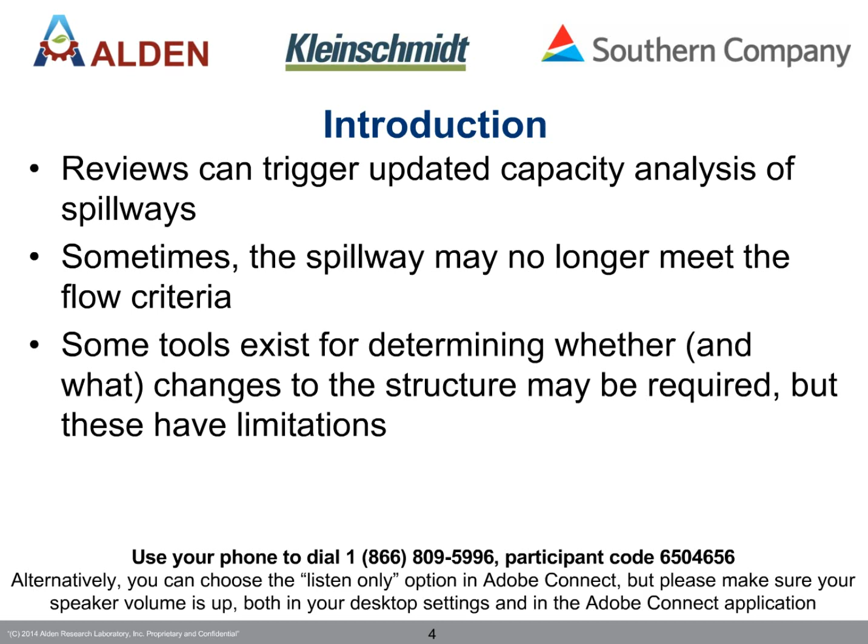So to start out, we have Paul Sear, who's a PE. He's a principal of Kleinschmidt Associates. He's been with them since 1977. He specializes in dam safety and vulnerability security inspections, design and stability analyses of dams, floodgate design, and construction and maintenance inspections. Since 1988, he's been recognized by FERC as an approved independent consultant and a PFMA facilitator. He served on FERC's Gate Committee, developing guidelines for their proposed risk-informed decision-making program, and he was the secretary and contributing author of the publication Civil Works for Hydroelectric Facilities, Guidelines for Life Extension and Upgrade, written by a hydropower task committee for the ASCE Energy Division. He has a bachelor's in structural engineering from Northeastern.

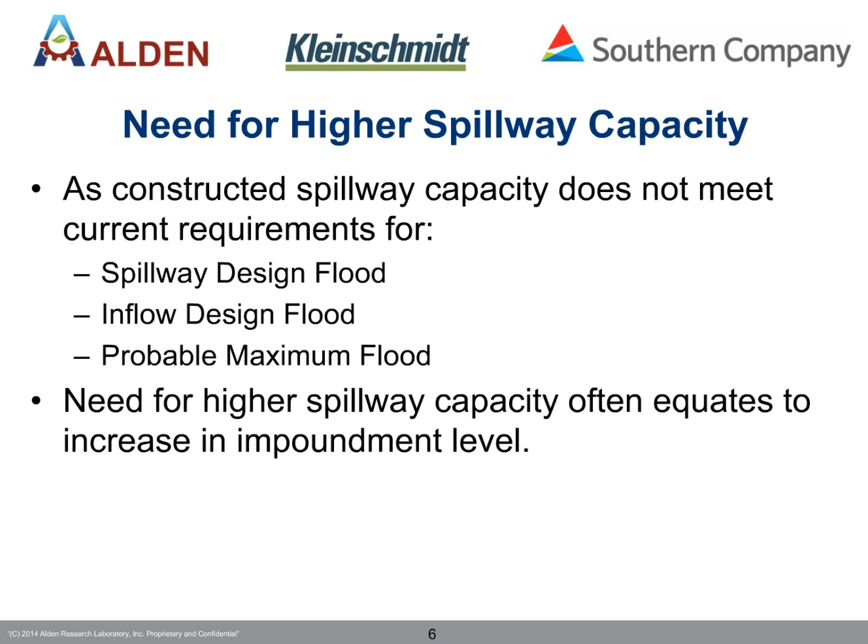Once you decide you need more capacity to meet the governing agency's design requirements, it all usually equates to one thing: we have a higher impoundment level. So the increase in an impoundment level starts to chase us. It has a direct negative impact on the stability of all the water retaining structures, not just the spillway, as a result of increased hydrostatic load on the dam, along with increased uplift pressures.

David, I don't know, we are missing figures on these slides. Oh, just click through and they'll come through. So sorry. Okay. Sorry, folks.

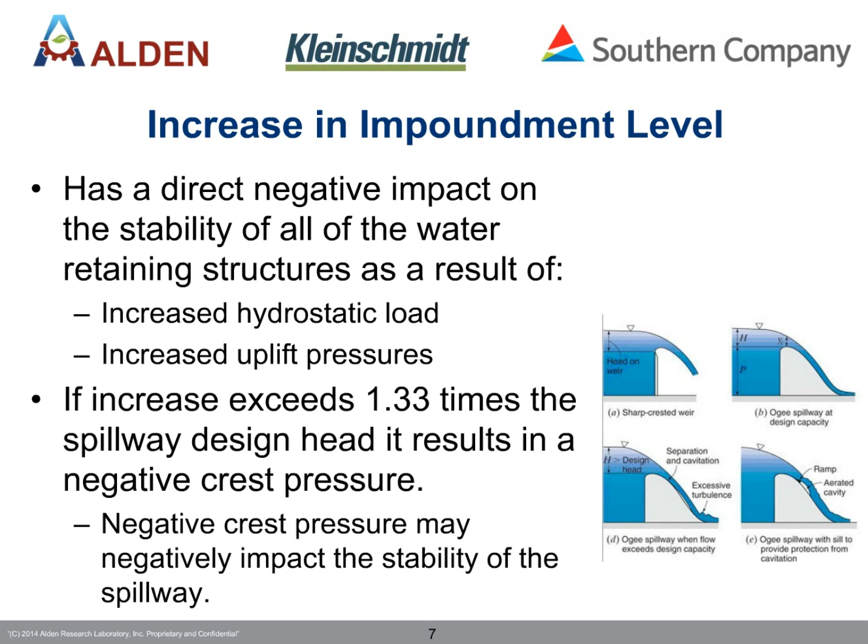But the Army Corps of Engineers has indicated that if your demand on your crest is about 1.3 times what the original design head was, you're going to result in negative crest pressures. The negative crest pressures have a negative impact on the stability of the structure because it's an extra force that, frankly, was never accounted for back before 1940.

We also have changes that have occurred on a spillway crest over time. Spillway gates are replaced—Obermeyer gates are an excellent example of a lot of people changing out old crest gates or flashboards. There's also things, and I think many of us in the north can appreciate this one, we do a lot of resurfacing of the downstream face of a dam. So ask yourselves, how many times have you actually restored that ogee crest to the original geometry it was based upon? All of these have one common impact.

It results in a change of the impoundment level, and it results in a change in crest pressures—they're all due to the spillway discharge capacity being increased.

The figures shown are of a real project. The upper right-hand side shows horizontally rotated flashboards. They're five feet high, originally built as vertical flashboard pins, and at some point got changed to horizontal. The photograph below shows what it looks like after it's been rotated, but before being restored.

It's supposed to be self-righting, but as you can imagine, you get debris underneath them, and they don't right themselves too well. So even though you have additional head on this structure, ask yourself: what does this new flashboard arrangement do for my crest pressures?

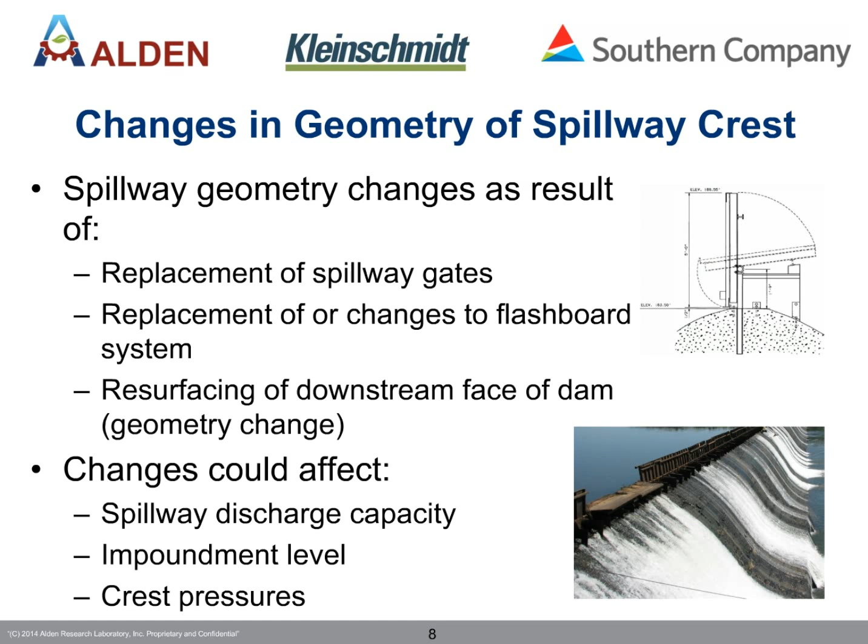Increased discharge capacity also results in a direct impact to the tailwater. As you increase your flows, you could literally blow the tailwater away—suppressing it right at the base of the spillway, and in doing so, reducing the resisting tailwater forces that may occur against the spillway.

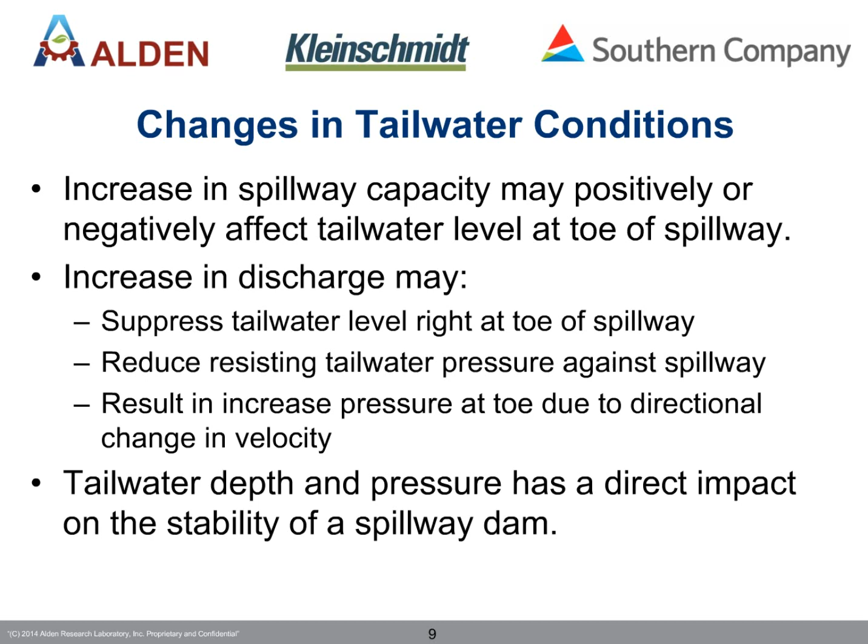At the same time, the increased velocities may actually result in a favorable positive pressure along the toe, due to the change in direction of the velocity flow. So tailwater depths and pressures on the downstream side of the structure have a direct impact on the stability of the spillway dam. They may not affect your non-overflow structures, but they will affect your spillway dam.

Earlier I said you could have an increase in positive pressures at the toe of the dam. If you have a dam with foundation drainage systems, the velocities increase the pressures on the outlet of the foundation drainage system. So the question that always gets asked is: do those higher pressures at the outlet get translated back underneath the dam via the drainage system itself, and do those pressures result in a decrease in stability of the dam?

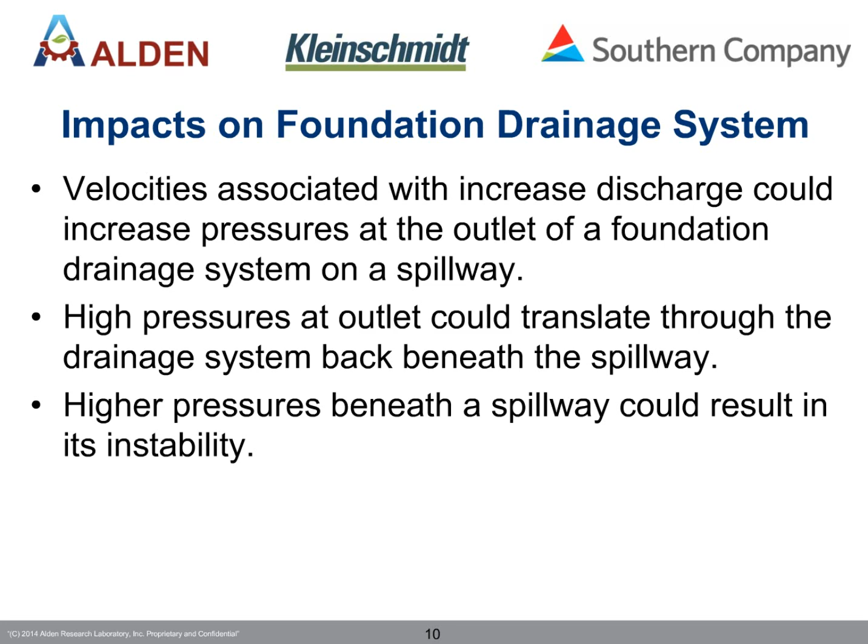So everything I talked about before has to do with what was happening on the head pond end.

Dams that are regulated by state agencies are governed by downstream development, which will have an impact on the dam's discharge capacity. As development increases, the dam's hazard classification increases, and usually, the higher the hazard classification, the greater the discharge capacity you need.

So, which means you get a choice: you expand your spillway, or you discharge more water over the spillway that you currently have.

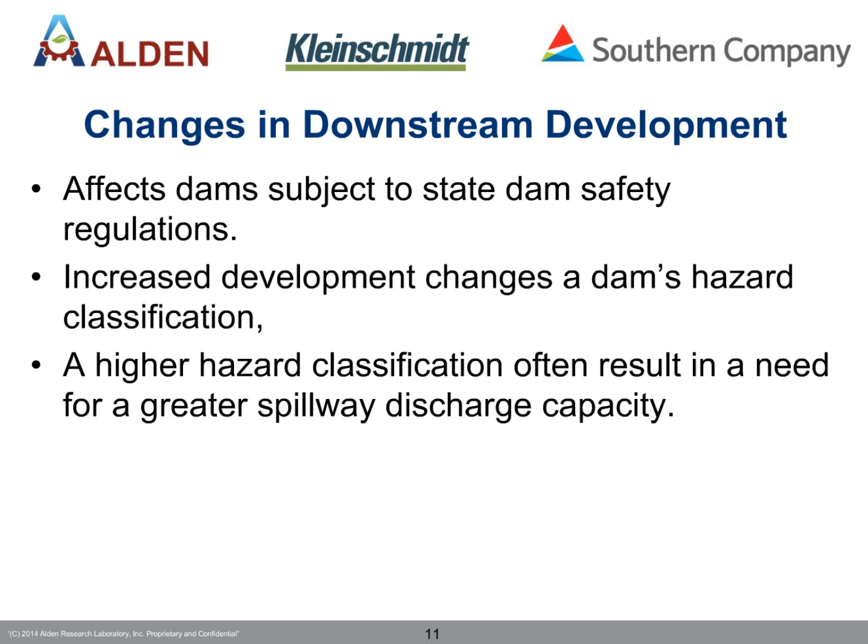So this actually closes my part of the discussion. Again, I'm viewing the structures as they exist, and I'm passing judgment back to the owner as to whether they meet the state or federal agency's current design criteria for spillway capacity and stability analysis.

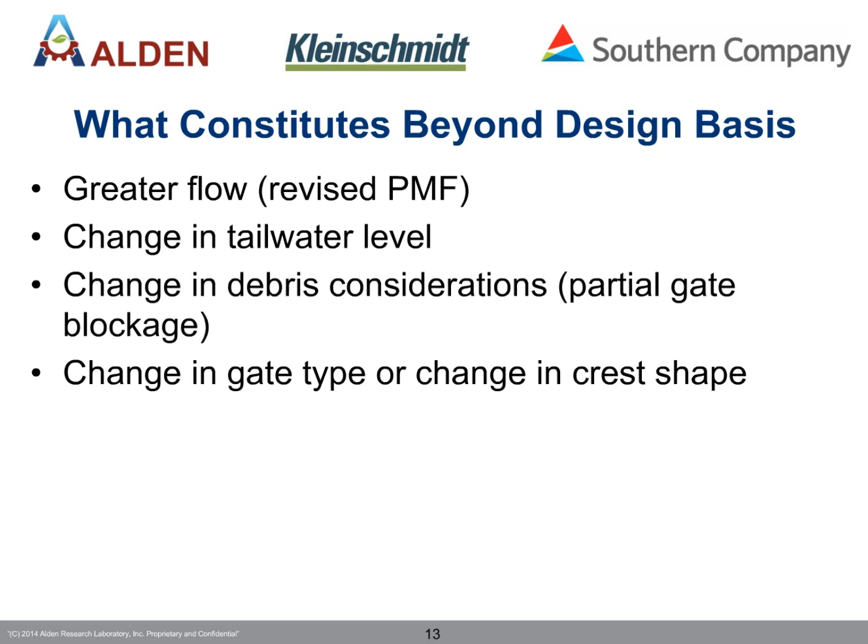So, changing debris considerations as well. This can be a partial gate blockage that might not have been considered in the original design, where you now realize that as debris builds up on the gates, they might not all operate exactly as planned. A change in the gate type or a change in the crest shape—if you replace one gate with a different type, that may affect the rating curve for that particular structure.

And then a change in reservoir operating levels. If you are increasing your pool level because of recreational needs or other considerations, that could change the flood routing through the reservoir as well.

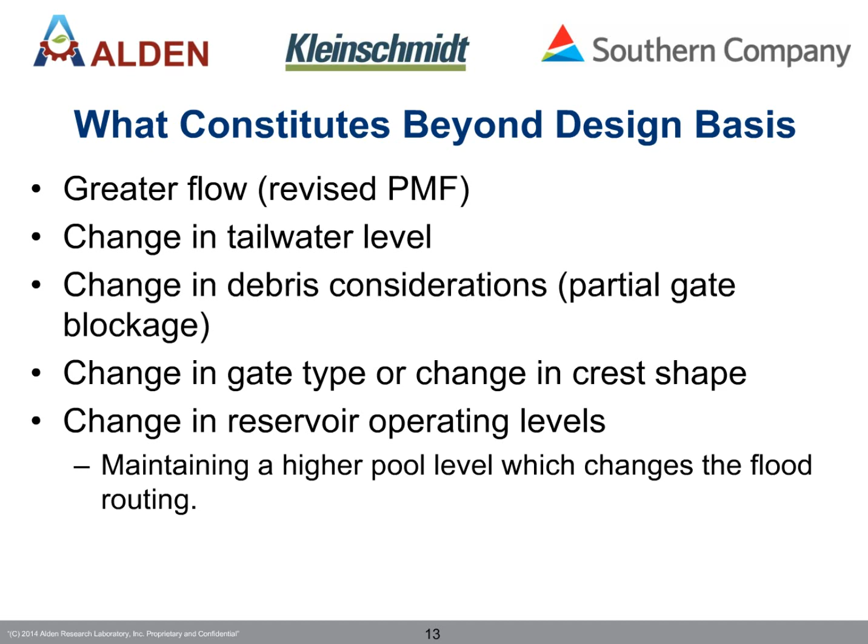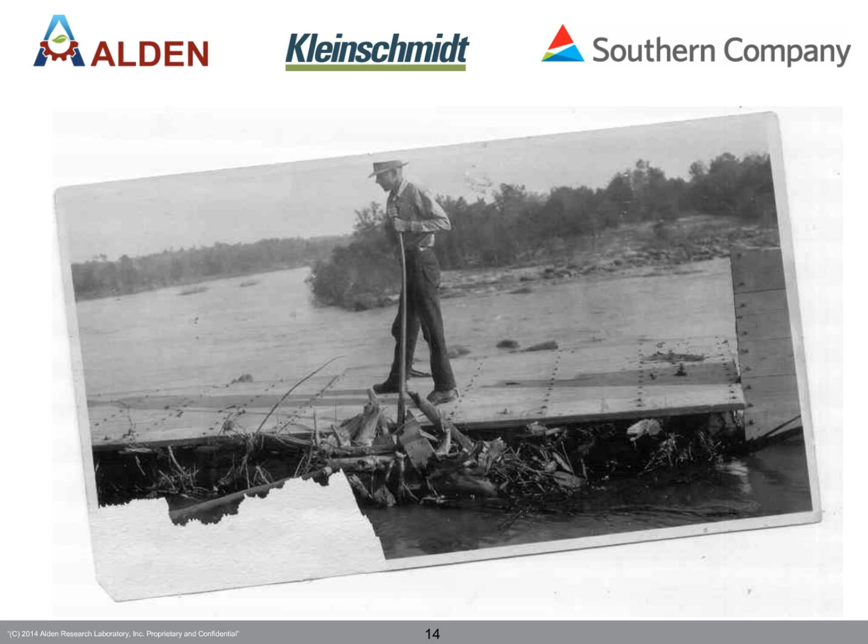You might remember Paul's picture of the hinged gate that could rotate. This is a picture, I think, of the same gate with debris built up, and obviously this spillway is not going to perform quite as expected because there's not a whole lot of water going through under the gate. Most of it will have to go over the top.

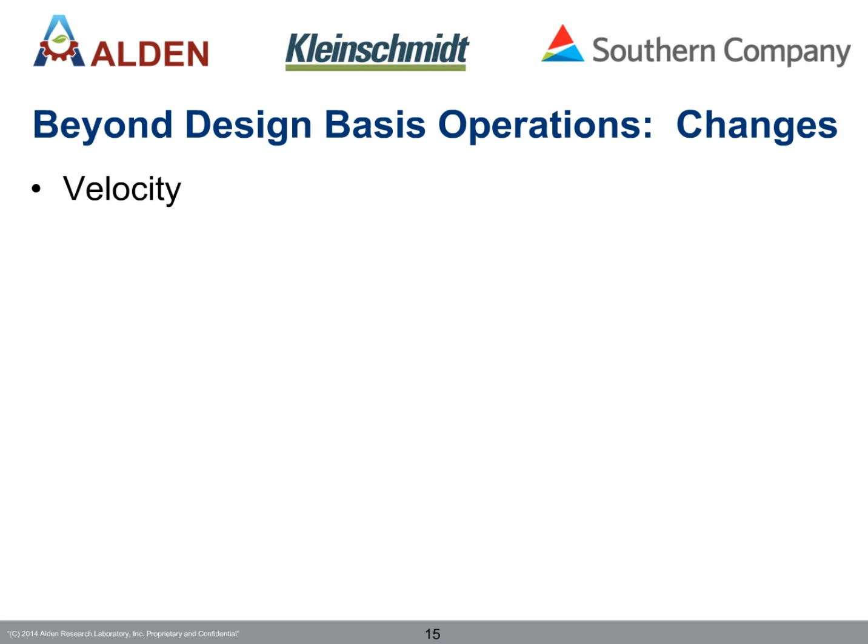So beyond design basis operations, what's going to change on the spillway from a hydraulic perspective? Well, the most obvious one is probably velocity. If you send more water down the spillway, there's a pretty good chance the velocity on the spillway is going to increase. The other thing that can change is surface pressure on the spillway.

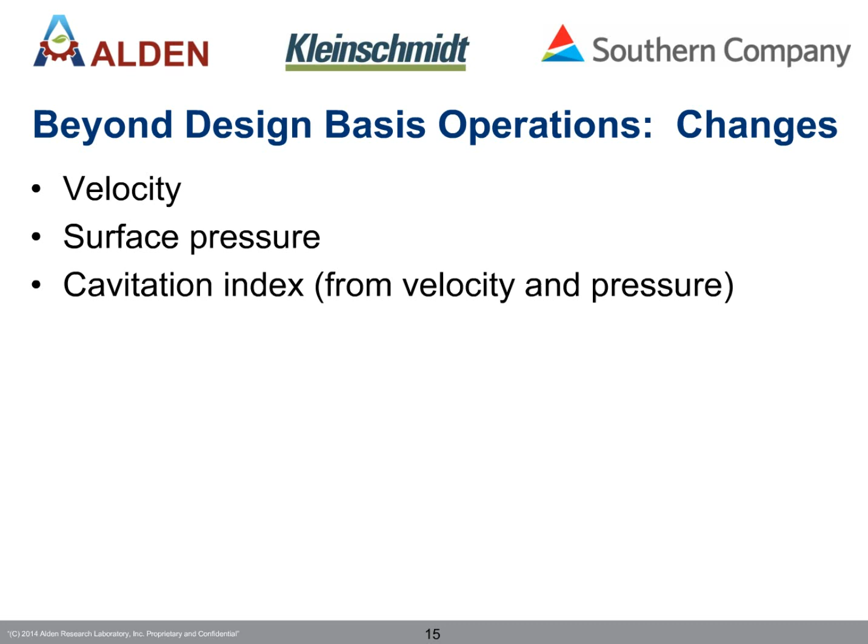And if the velocity were to change, and/or the pressure changes, that could result in a change in the cavitation index for the spillway as well. So we may start to see cavitation that we weren't seeing under the design flow conditions.

We can get uplift on a spillway, so even if there's no cavitation, that doesn't mean pressures might not be low enough to generate some uplift on the spillway surface.

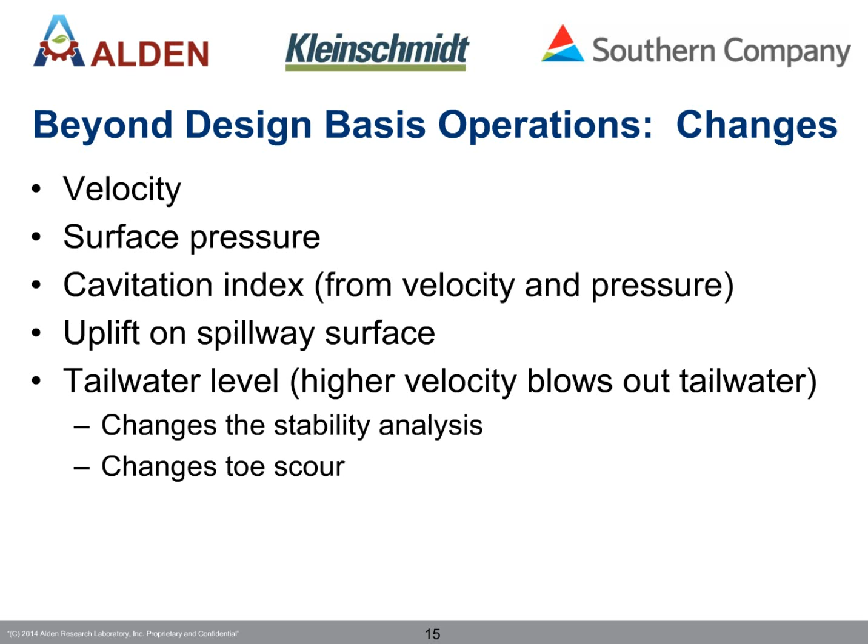And then tailwater level—we mentioned this a moment ago, that a higher velocity can result in a blowout of the tailwater, so you change the back pressure on the dam. That would be one effect on stability, but it can also change the toe scour at the dam. If you were counting on energy dissipation from that tailwater level to protect the toe, and the tailwater is blown out, that can change.

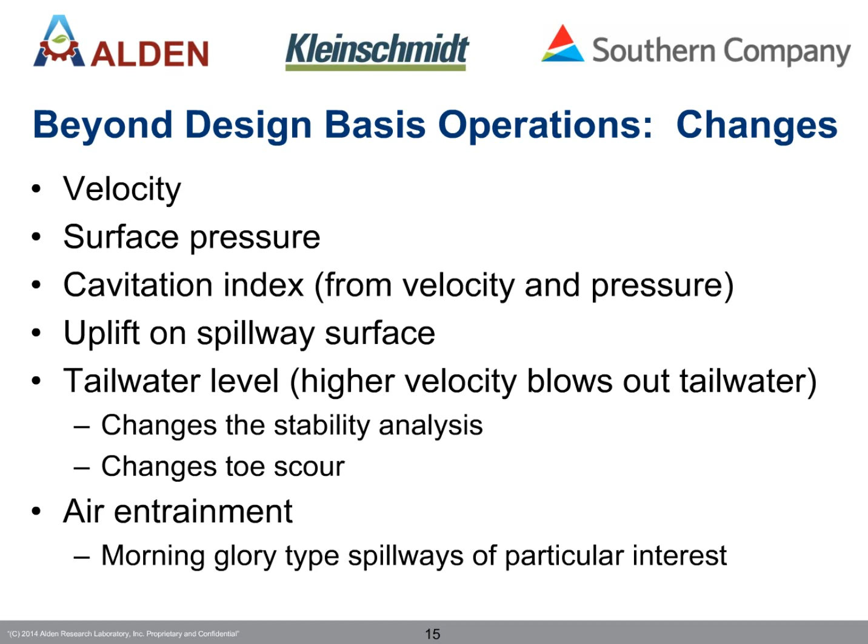And then air entrainment—this is really limited to certain types and classes of spillways, but there are certain spillways that have to draw air as they are operating. If we are unable to meet the air demand of those spillways, it will change how they perform. Morning glories are a great example that entrain air, but labyrinth weirs and fuse gates, depending on the fuse gate type, will also require some air entrainment systems.

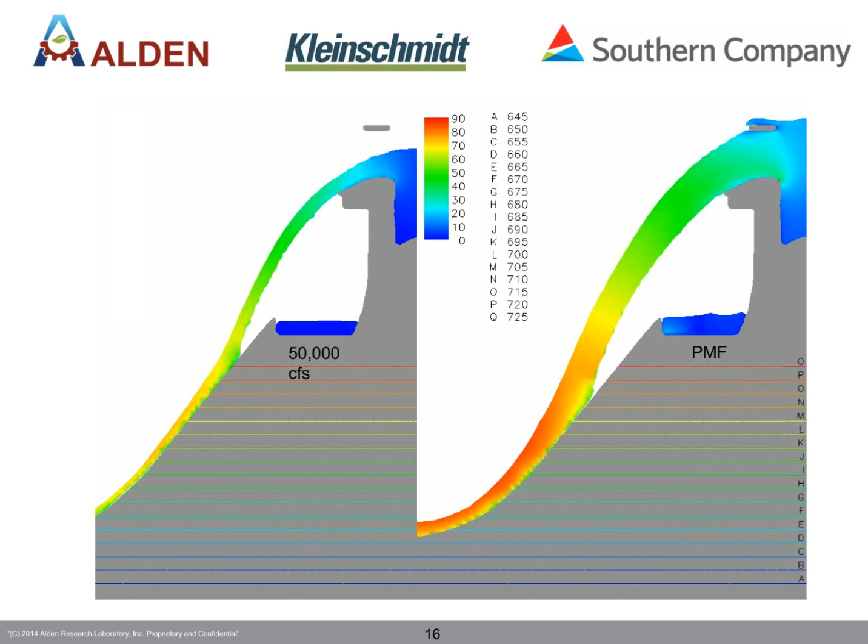So the next thing I want to show you is a picture of a typical CFD model of a spillway that shows beyond design basis performance. On the left, you see the design flow that the spillway was designed for, and on the right you see the newly calculated PMF for the same spillway, which is significantly larger. What you see is an increase in velocity on the bottom of the spillway chute, and the trajectory of the nappe has changed slightly, going further downstream before it reattaches with the catch chute.

So what tools do we have available for predicting performance change? Well, the obvious one is physical models—that's what we've been using for over 100 years now, at least as an engineering community. With physical models, we can measure pressure, velocity, and water level, and we can capture low and high-speed time-dependent fluctuations in those quantities.

So if we want to know how pressure changes at a high rate of speed, we can use high-speed pressure transducers and measure those fluctuations. The biggest limitation on physical models—I'll back up by saying if they're properly scaled, the results of physical models are generally accepted as being correct. Now, the biggest downside or limitation to a physical model is that they can be costly and time-consuming to build.

So more recently, meaning within the last 15 or so years, we have been able to use numeric models to look at some things that in the past were done with physical models. And the two models that are probably the most widely used for spillways are FLOW-3D and OpenFOAM. And with these models, we can calculate pressure, velocity, and gradients of those same quantities.

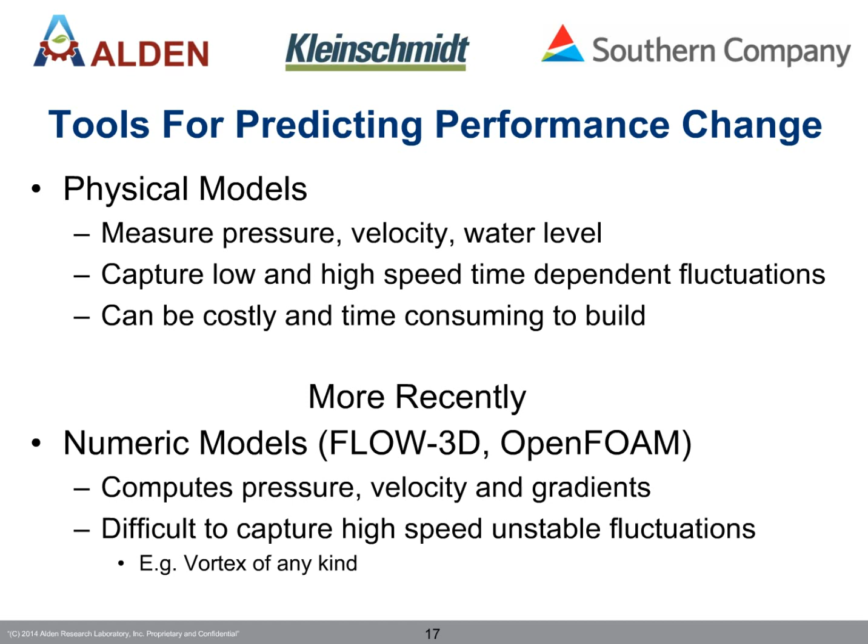But what the models struggle with to some extent is capturing high-speed unstable fluctuations. So any kind of vortex shedding that might occur in a structure is going to be hard for a CFD model to get.

So let's talk a little bit more about numeric models for a few slides, and then we'll talk a little bit more about the physical models before I wrap up.

So about 15 years ago, Alden compared CFD and physical model results for a spillway, and then we published those results. We were looking at the stage discharge rating curve and the trajectory of the flow. We found the stage discharge rating curve was within about 3 or 4% of what we were seeing in the physical model.

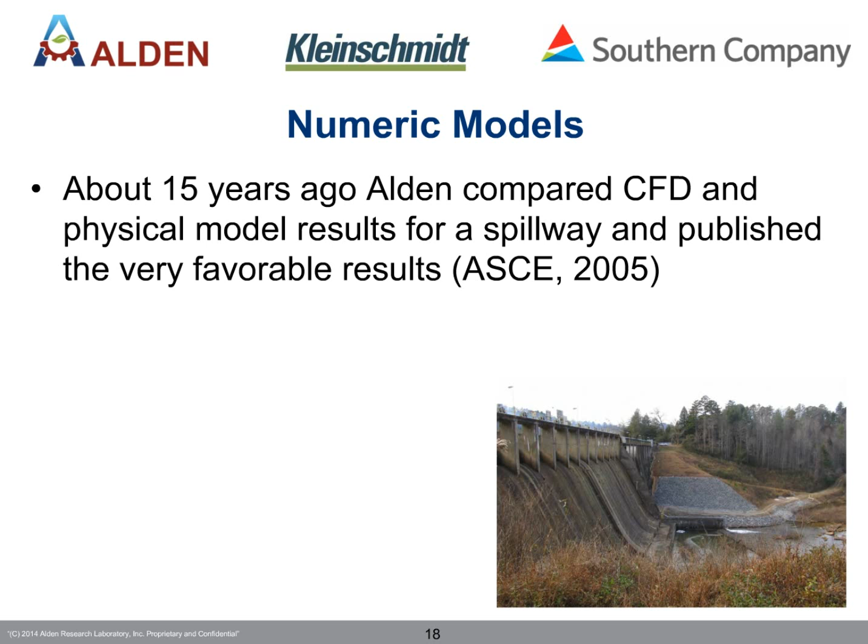Now, with each successful use of modeling, especially in the world of numeric modeling, it's probably good to keep in mind a quote from Bill Gates. And that's that success is a lousy teacher. It seduces smart people into thinking that they can't lose.

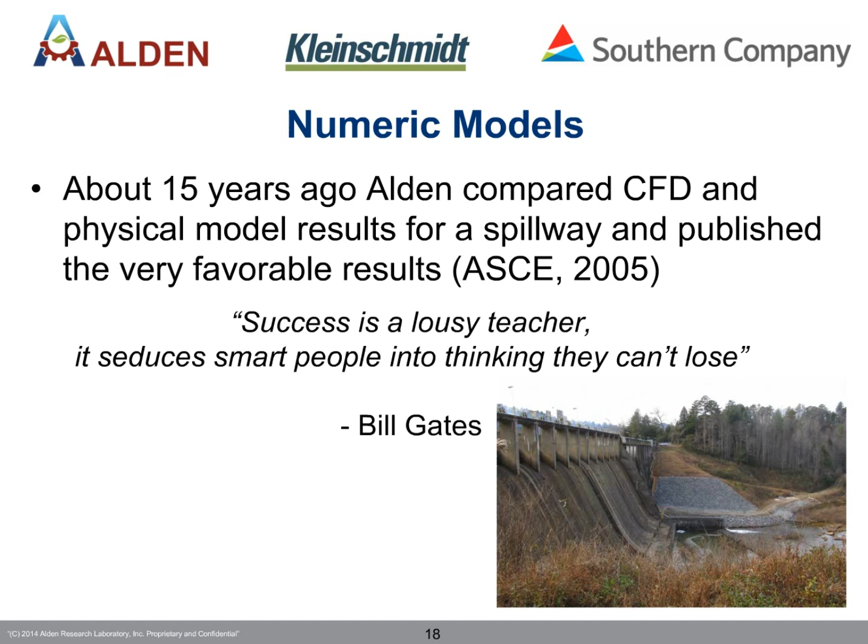And the takeaway there in a numeric modeling sense is just because we can model certain types of spillways reliably, and we've shown that they work, that doesn't mean that the numeric model is going to be applicable to every kind of spillway. So we need to try to keep that in mind and make sure that the models have been validated for the type of spillway that we're working on.

So how do we decide which model is needed, whether it's a physical model or a numeric model? Well, the availability of model validation data can be a good factor in deciding what type of model that we're going to use.

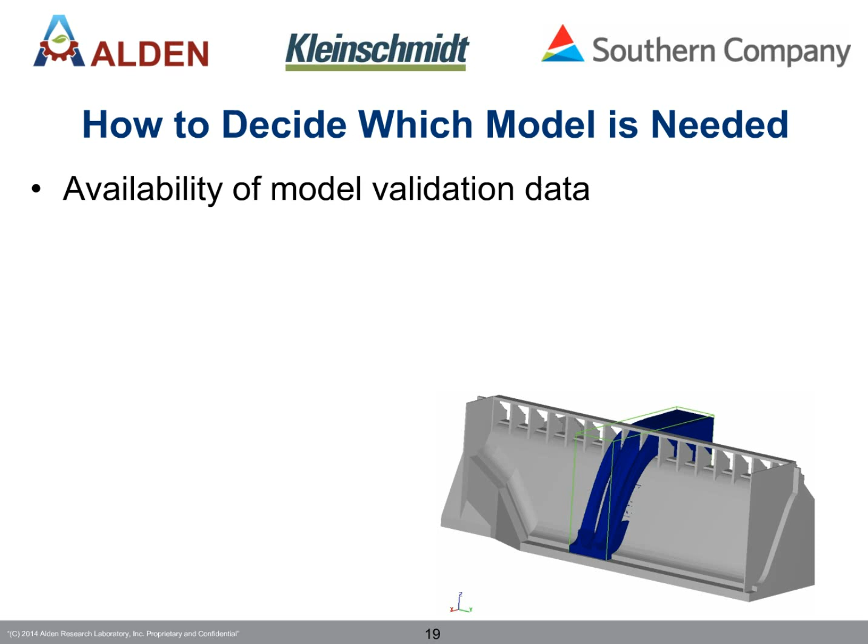Model geometry is a big influence. Certain geometries are notoriously difficult to capture in CFD. Very large labyrinth weirs, for example, because of the high detail of resolution that they need, can be difficult to get. Not all of them, but some of them.

The size of the model domain, so very large spillways, can be a challenge in CFD. We simply run out of computer memory and computational cells to resolve the flow field in enough detail. And then the allowable uncertainty within the model results.

Finally, parameters of interest can influence as well what type of model that we're going to use.

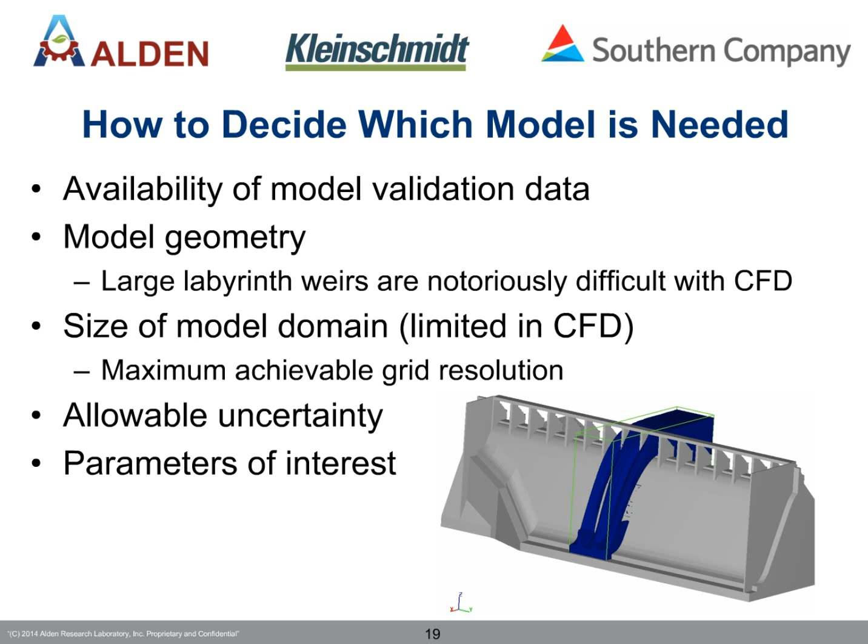So let's talk a little bit more about the limitations of CFD models. Grid resolution is usually the most significant one, that we run out of computational cells, and that'll be recognizable when you look at the results - the flow field will break up, it'll disappear as the grid resolution becomes too coarse.

Another challenge can be that these problems can be two-dimensional, and we tend to think of spillways as being very three-dimensional. But if you think of a very long spillway chute where the water depth is relatively small, that is really just a tilted two-dimensional problem. And those two-dimensional problems tend to pose a challenge for CFD.

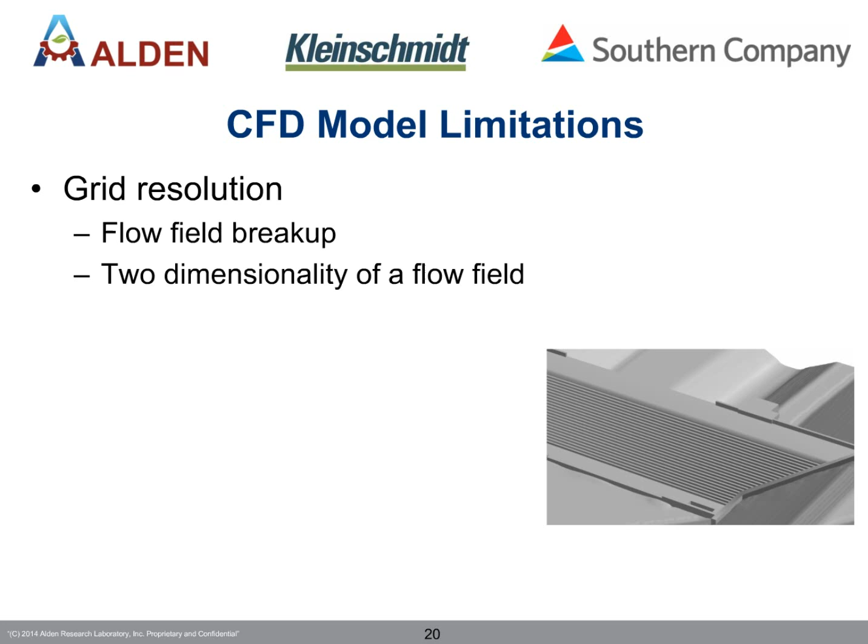Again, we can run out of computational cells. Pressure and spillway pressures and pressure fluctuation in vortices can be difficult, so stepped spillways, and hence the picture that I'm showing on the right. We do very well predicting bulk flow parameters down stepped spillways, but if we're looking at the pressure fluctuations, for example, on the face of an individual step, those are strongly influenced by the vortices that are shed off of that step, and those are so small that we have a hard time seeing them when we're also trying to see what's going on over a large domain.

And then air entrainment, and this comes down to a question of the physics involved in the model. For example, air entrainment requires a coefficient in order to get the air entrainment rate correct in the model. But where are you going to get that coefficient from? There is not a default coefficient that applies to all situations.

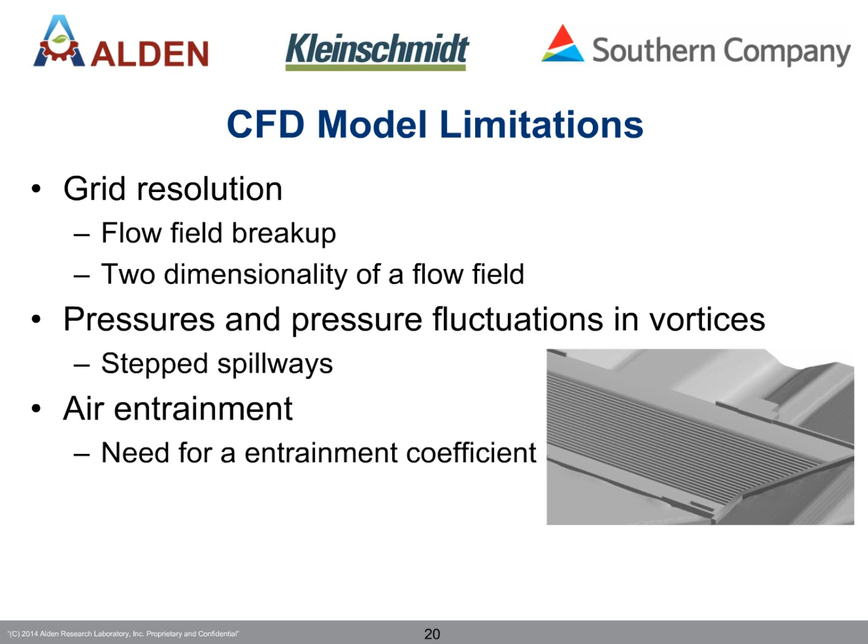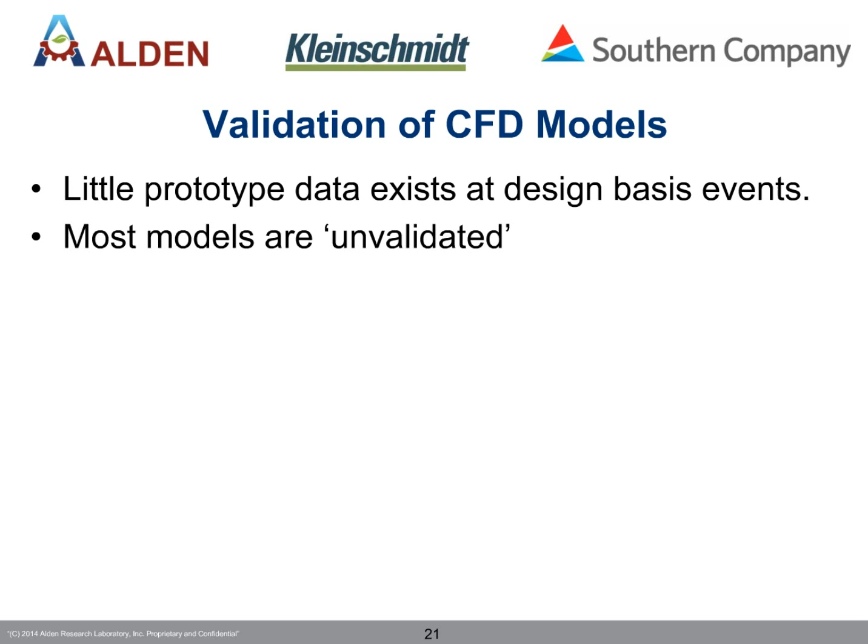So let's talk a little bit more about the validation of the models and how we do that. There is little, or as far as I know, no prototype data during design basis events, during a PMF where someone has instrumented a spillway and measured all of the performance, the velocity, the pressure on the surface, and so on. So in the truest sense of the word, one would have to argue that these CFD models are largely unvalidated, at least against prototype data.

But what we have done is validate the models against physical models. We see there, for example, that pressures on an Ogee spillway using physical model data, we've shown that that's fairly reliable and that we get those right. And the same with the stage discharge rating curves. So after looking at a number of physical model and CFD model comparisons for Ogees,

we feel very comfortable with the results that we're able to get for that particular class of spillway. Now, we know that there are limitations with some spillways, and usually if you trace it all the way back, it comes down to a question of computer speed and that we can't get a high enough cell count to be able to resolve what it is that we're after.

And then the last question when we talk about validation is an unvalidated CFD model better than no model? And in most cases, I would say yes. If the model that you're doing has been, if that class of model has been validated, then you've definitely gained insight that you otherwise would not have had.

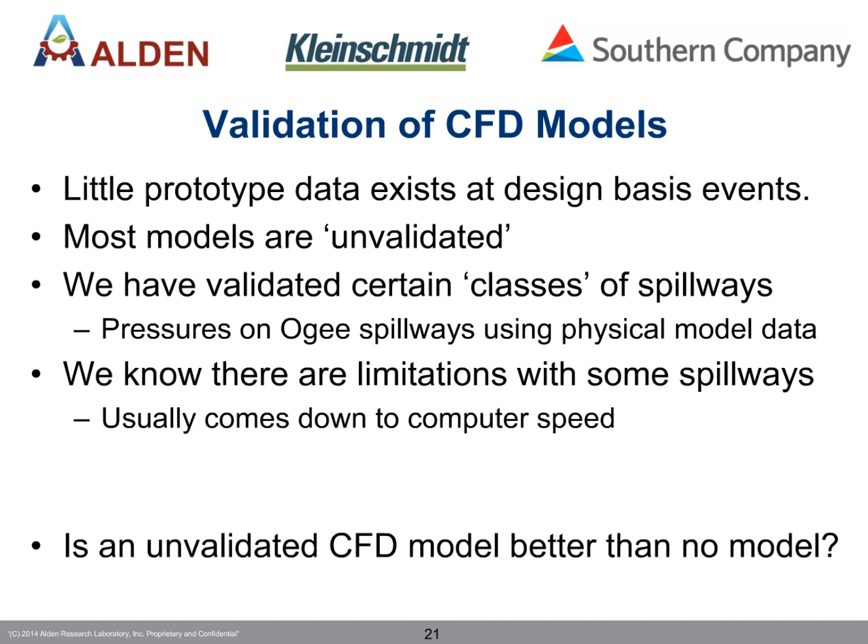What we need to be careful of is when we use CFD models in a realm that they have never been used before, and to not be led astray by a CFD model result that is unvalidated. So that's where the caution is required.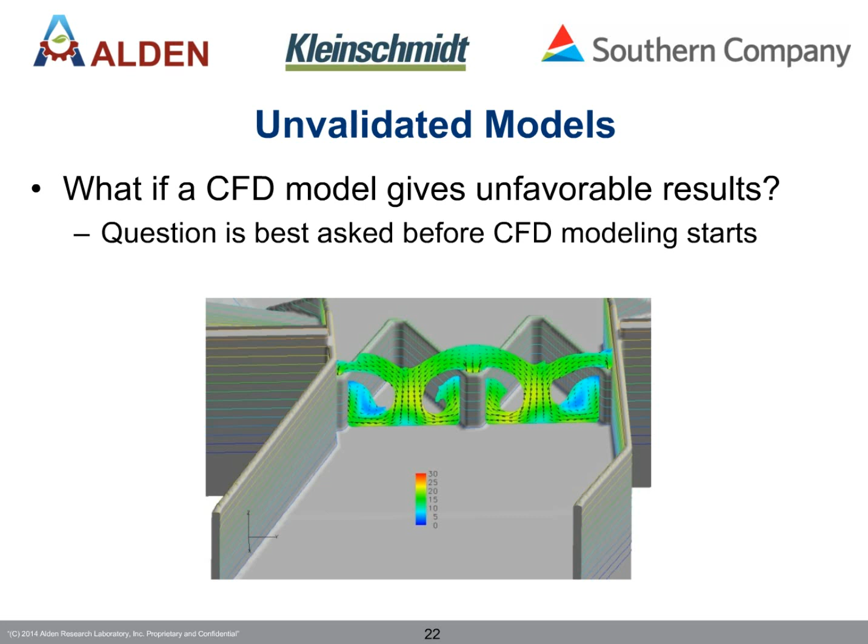So one last thing about unvalidated models. A question worth asking yourself before you start modeling is, what if a CFD model gives you unfavorable results? And that's probably a question that is best asked before the modeling starts, so that you know how you're going to step through the modeling before you have the results and how you intend to progress. Now you can still let the results guide your thinking, obviously, but when you go in, you should try to have a plan. And I think Todd will speak more to this in his presentation as well.

So tips on minimizing CFD uncertainty. Most of the uncertainty in these models probably comes out of boundary conditions, uncertainty in the boundary conditions that we have to apply. And this is a limitation not just for CFD, but for physical models as well. It's the same issue.

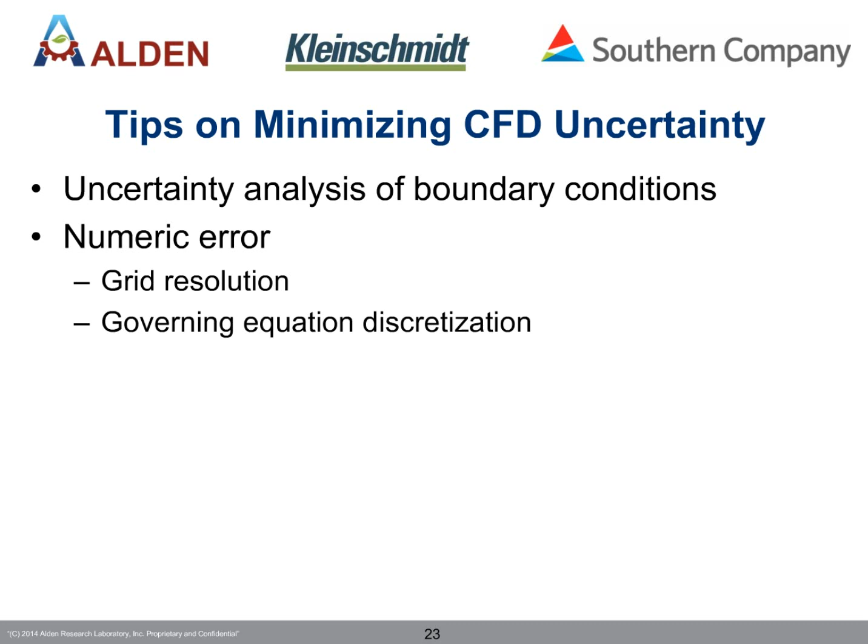Next, limiting or focusing mostly on CFD or only on CFD is numeric error. So problems with the grid resolution, not being able to get it high enough. Governing equation discretization can cause uncertainty. Applicability of the submodels that are being used.

So an air entrainment module, where do the coefficients in that module come from? Before you use them, track them back to the basic research on which they are based. From that, you know how to vary those coefficients, and you can see how they influence the results of your model.

So these uncertainties can be tested. And the same is true for turbulence models. You can use different turbulence models and see how they influence the results. So the takeaway is to test your models against known information.

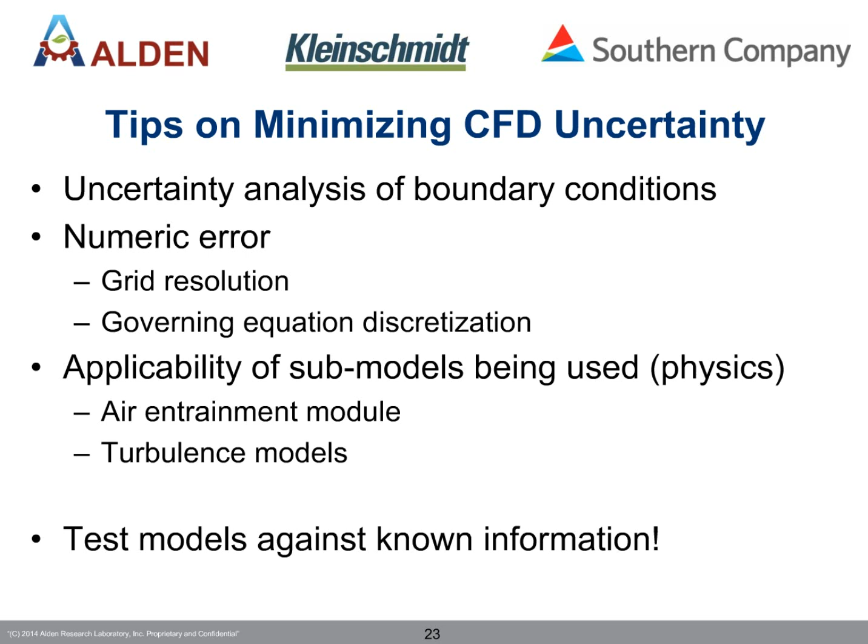Let's talk a little bit about physical model limitations, because these are not without limitations either. Most of those are driven by scale. Large spillways can pass a significant flow. And if you were to think of a 1 to 25 scale model, which is a reasonable model scale, a spillway passing 400,000 CFS prototype is going to require 130 CFS in the model. And while that's doable, that's pushing the upper ends of what we can still push in a scale model. That's a pretty big flow to do.

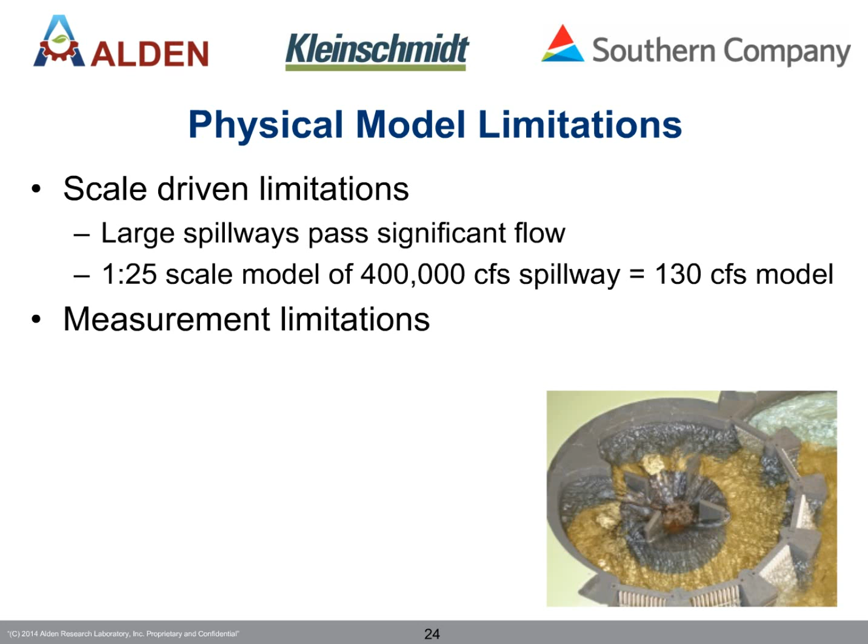And then measurement limitations. Can we make the measurements that we want to make on the physical model? Can we put the pressure transducers where we need them? Can we get the velocity measurements that we want?

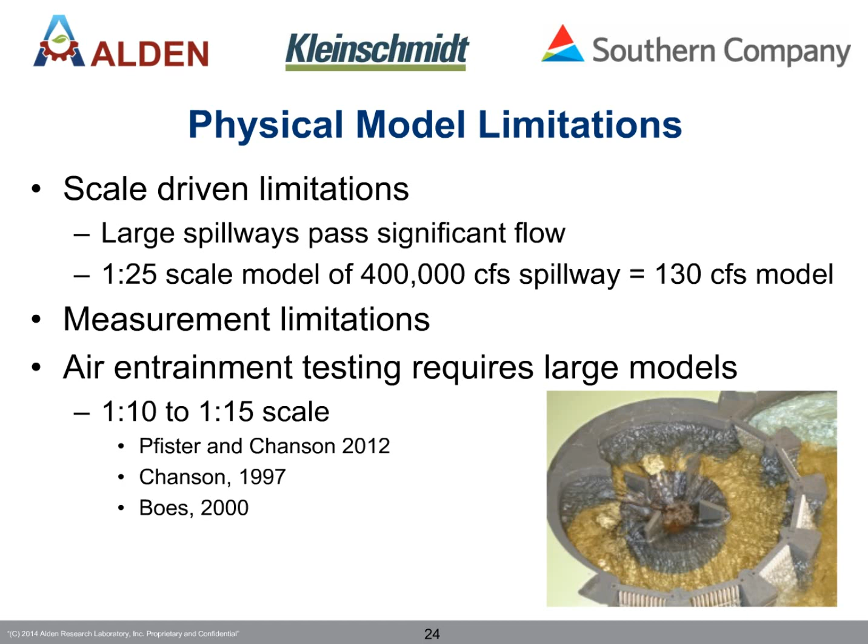And then finally, models that are sensitive to air entrainment have particularly unique challenges because they are required to be very large. And so we know that these models, in order to get the air entrainment quantities correct, we need to run these at a 1 to 10 to 1 to 15 scale. And that's based on fairly recent research, actually, that the models need to be that large.

So if you have a case where you have a CFD model and a physical model, the question that comes up is, which results do you use? If things go well, the stage discharge curves are going to be within 2 or 3%. What we would suggest is that you should probably rely on the physical model. We typically see the stage discharge curve from a physical model to be slightly more conservative than that from a CFD model, and we think that has to do with scale effects. Physical models should overpredict the water level in the pool for a given discharge due to scale effects.

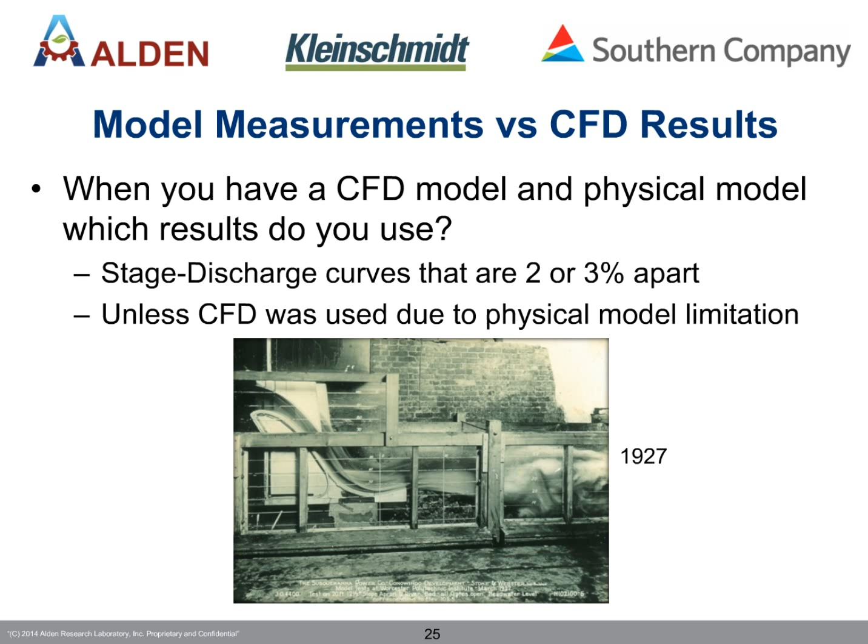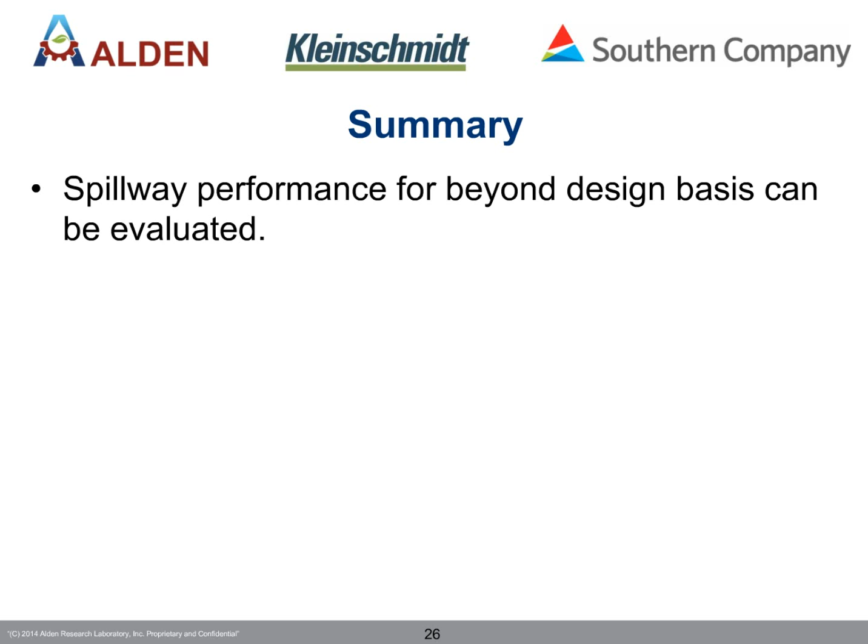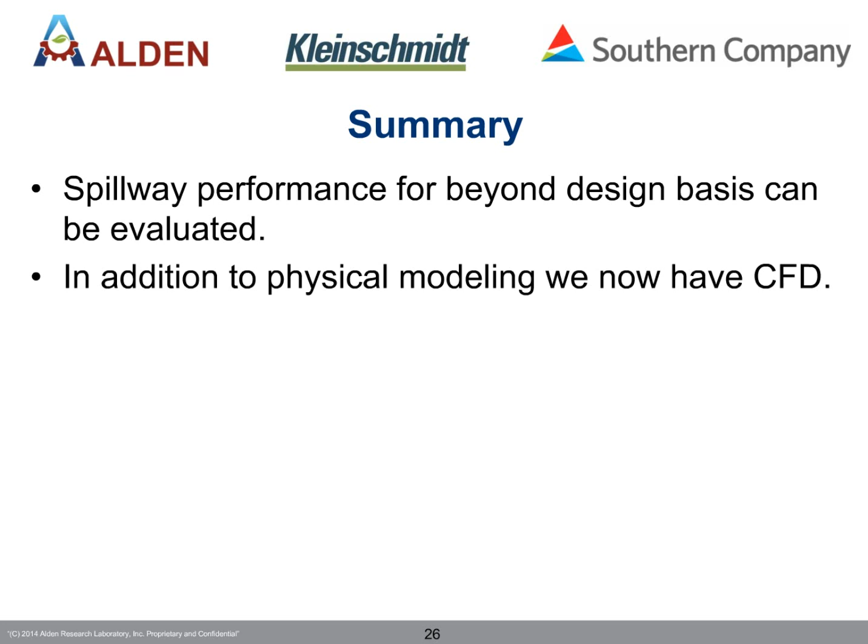So a summary of the modeling options we've talked about. First, spillway performance for beyond design basis can be evaluated using either physical or numeric models. Second, in addition to physical modeling, we now have CFD, and while it has limitations, it is a useful tool to help us in the analysis.

When choosing a modeling approach, it's probably good to consider the project goals and the benefits of each model. Try to talk to someone who understands both options and can give you the benefits and limitations of using a numeric model versus a physical model. There are certainly cases where people have asked us for a numeric model, and the physical model was actually only fractionally more expensive and did not have some of the limitations that the numeric model was going to have.

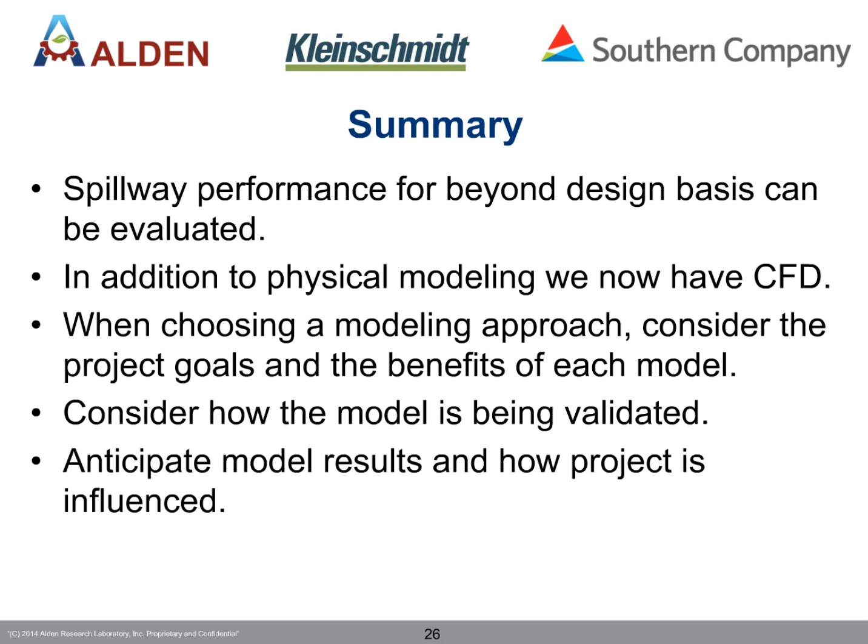Consider how the model is going to be validated. There are uncertainties or errors in all models, but think about how we're going to validate it to make sure we know it is useful for what we want to use it for. And finally, anticipate how the model results are going to influence the project, and try to make a plan for how to move forward through the modeling program depending on how the results turn out, so you have a strategy going into the program and you're not just reacting to the results you get.

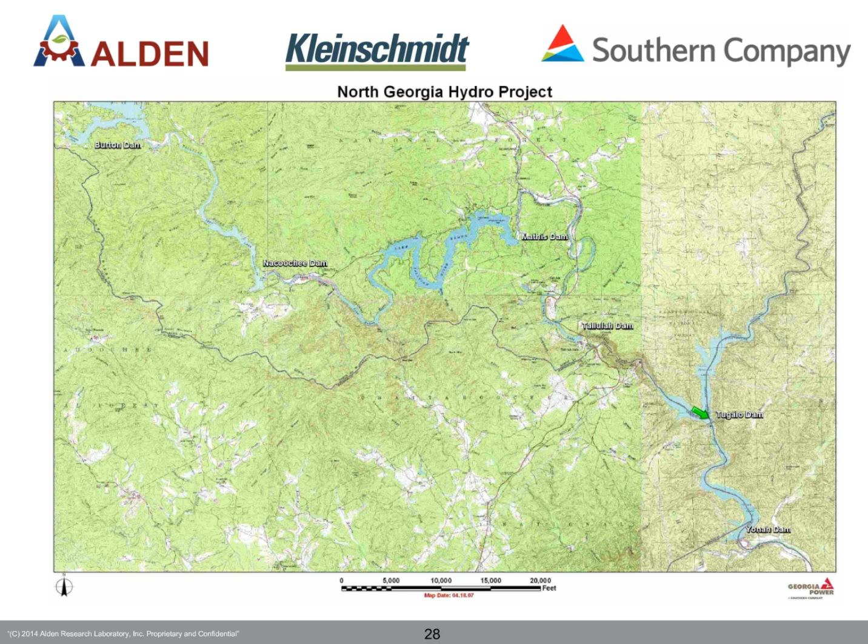Those are both gravity dams. Mathis Dam I'm going to talk a good bit about in my specific examples of where we've used CFD and physical modeling. Then Tallulah Falls Dam, which a lot of people are familiar with—there's a state park in that area, a real nice area along Tallulah Gorge, along the Tallulah River. And then at Tugalo Dam, we have where the Chattooga and the Tallulah Rivers merge and come out of Tugalo Dam, and the Tugalo River flows down to Yonah Dam.

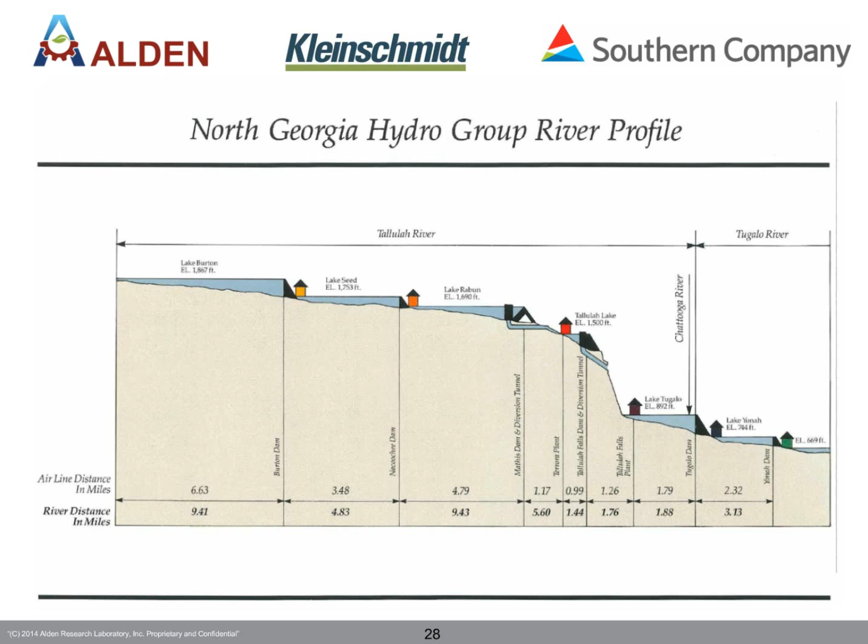This shows the elevation profile of these 6 projects. All of these are about 100 years old, plus or minus. As you can see, they had a pretty good idea where they needed to build dams even back 100 years ago. There's about 1,200 feet of head loss as you go along, over around 18 to 20 miles airline distance, and a bit more in river mile distance.

Back in the 80s, through some of our dam safety and regulatory inspection processes, it was determined that we needed to reevaluate our design storm, or in our case our PMF, probable maximum flood, through our dams. This was due to the publishing of HMRs 51 and 52 in the late 70s and early 80s. Essentially, the methods for determining the PMP for these projects had changed since original design.

So we did some flood studies to reevaluate the PMF for our projects. The previous work was done using HMR 33. That was done the last time they had looked at our PMF flows through the project, in the 40s, and then again in the 80s when we had to look at it again.

Studies were done and we determined PMF flows through our project, but at the time, in the late 80s, they wanted to have a better feel of how these new PMF flows pass through our project. So they wanted to check things such as spillway capacity, did we impact spillway bridges, did the PMF elevations overtop areas of concern, things of that nature.

So in 1987, they decided to work with Georgia Tech and do a physical model of 4 of the 6 dams in our North Georgia project. 2 of the other dams had crests that were very similar. For instance, Mathis Dam and Tugalo Dam had very similar spillways, with gated spillways with piers, so they used the information they gained on Tugalo at Mathis. Yonah Dam and Nacoochee Dam were both essentially free crest spillways, with one of them having flashboards, so they were able to basically model 4 of the 6 dams.

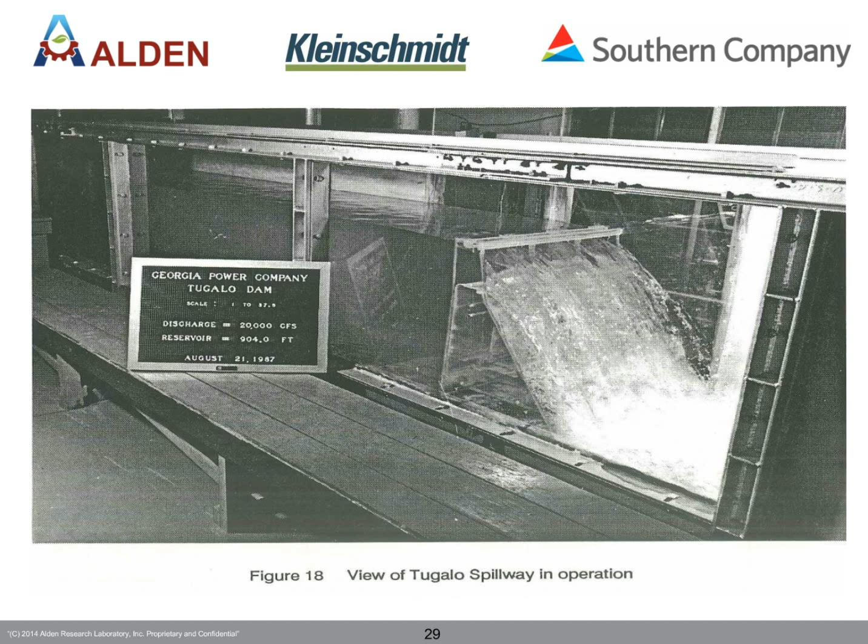After looking at the new PMF elevations back in the 80s, there was concern about whether we could pass the flows through this dam without impinging on the spillway bridge. The original PMF elevation for this dam was about 1695 - somewhere pretty low down, just barely above the gates, maybe 4 or 5 feet above the gates with the gates down. This spillway bridge deck is at about 1704, and the new PMF elevation was 1702.

So there was some concern about when the flows hit the bridge piers upstream that it may pile the water up and create uplift forces or push the spillway bridge off of the piers, which could lead to instability of the dam. So we had to figure out how to evaluate this, and what this led us to was looking at a CFD model, to model our flows and see if we impact our bridge.

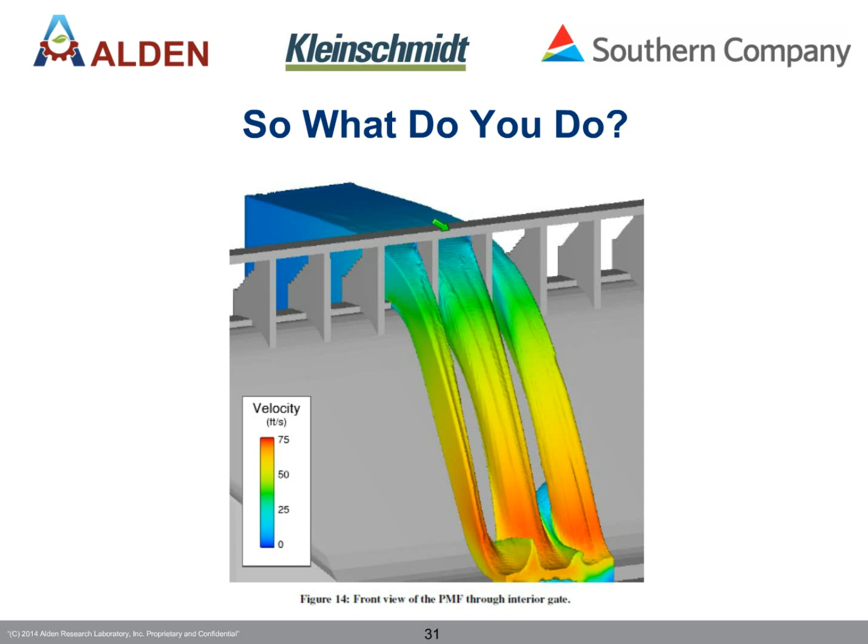And what we found through this CFD modeling - you're now looking from upstream to downstream - it did show that condition at the piers that we were concerned about, where the water may be piling up, but we found that it did not impact the spillway bridge, so our stability was not affected by losing the spillway bridge deck over the top of the piers.

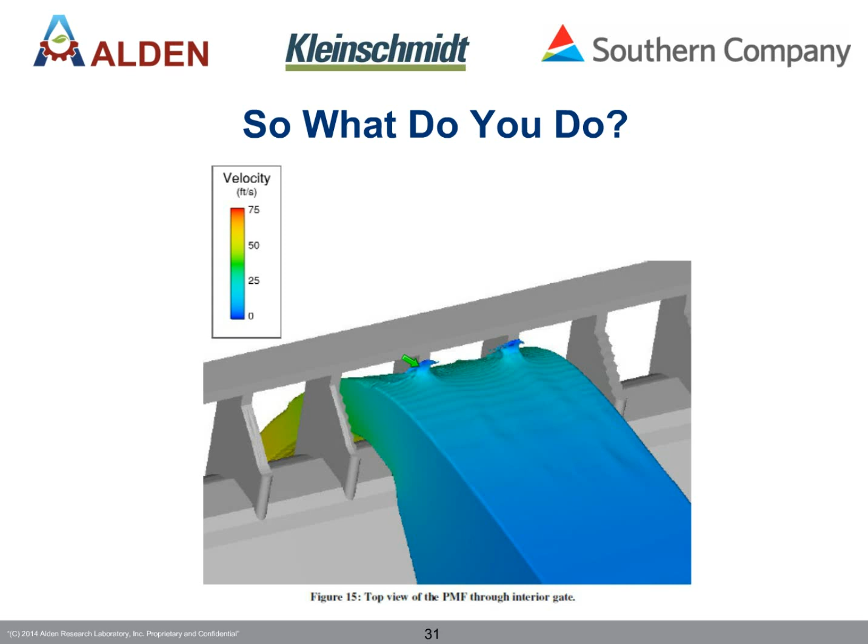But through this process, we solved one problem. We found out that we were not going to impact the spillway bridge, but our consultant told us, unfortunately, that while we looked okay with the spillway bridge, it looked like we had some negative pressures developing just downstream of the spillway gate, right in this area.

This shows the main area we were concerned with. We were not so much concerned with this area because that was just somewhat of a relic, since you were just coming off the spillway gate. But this area in here was indeed creating negative pressures and uplift forces that we were concerned about.

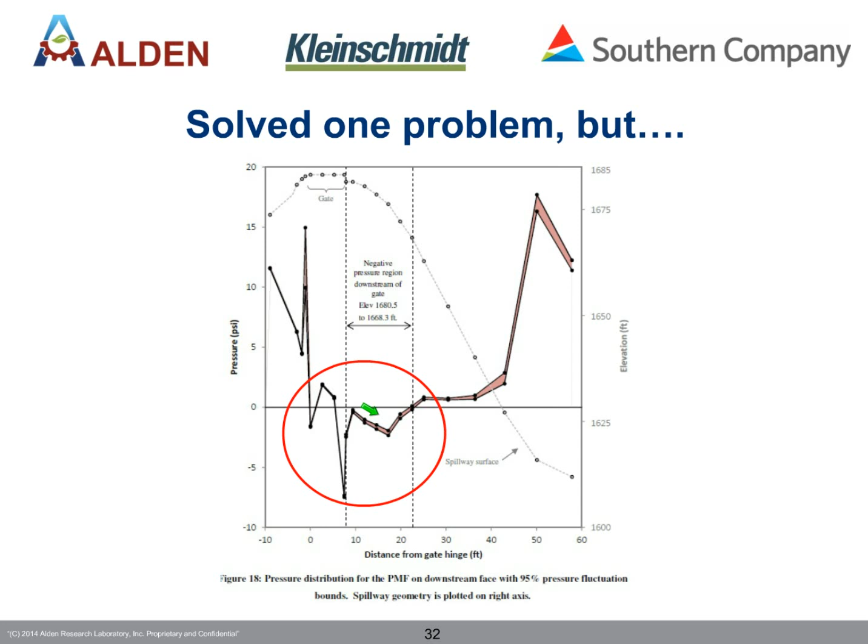The construction of this dam is basically the spillway slabs just lay on the buttresses and are held in place by gravity. They're not tied together with reinforcing steel. So there's a concern with these uplift forces that we could possibly actually lift the slabs off of the dam. Now, the original design basis considered that there was going to be negative pressures on this dam.

You'll never see them in this picture, but right up here at the top of the spillway there were 3 small vents placed in the dam to provide ventilation in this zone of negative pressure. Now, again, the original design storm was considerably lower than the one currently at about 1702, 1703, so these negative pressures were likely lower. But one limitation we had in the CFD model is they were not able to model these point vents in their modeling. It's just one of those limitations, and Dan may be able to speak on that a little more.

We were basically showing these negative pressures, but we were not able to show if the ventilation we did have on the dam from the original design did anything for us.

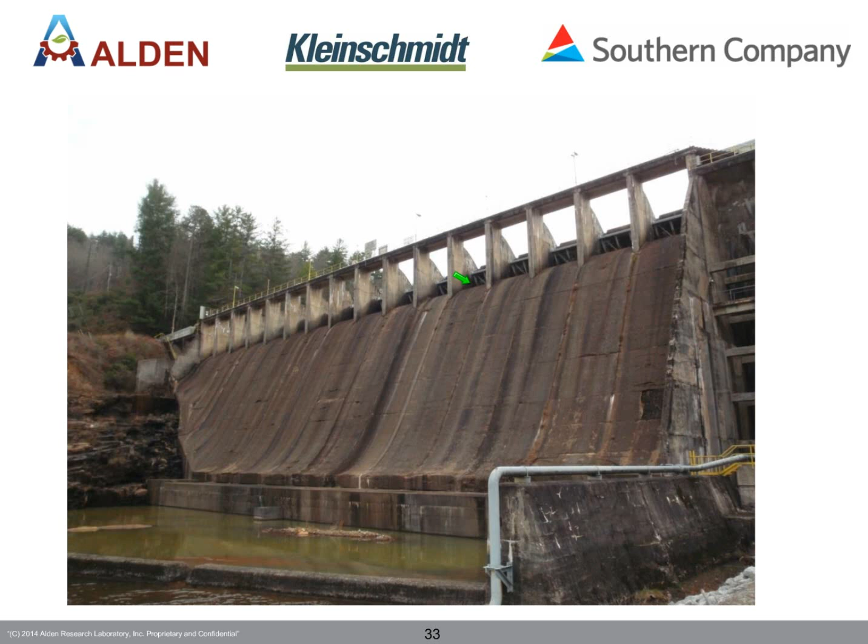As you look at this spillway, you can see there's somewhat of an OG shape at the top and bottom, but basically in between you're at about a 1 to 2 slope. So it's a very steep spillway. Once we took a step back and looked at it, it's not surprising that we were getting the nappe trying to separate from the spillway and creating these negative pressures.

So how do we solve that problem? What we decided to do after talking through it a good bit is do a physical model. We can physically model the current condition of the dam, or the baseline conditions, including the 3 vents that were installed in each bay.

We could also confirm the CFD modeling that had been done. We could see if the ventilation we have is adequate, and if it wasn't, we could relatively easily evaluate modifications to the dam to determine how we could possibly address these negative pressure issues.

So this is just a profile of the model that was done. I can't remember for sure, but I think it was about a 1 to 15 scale.

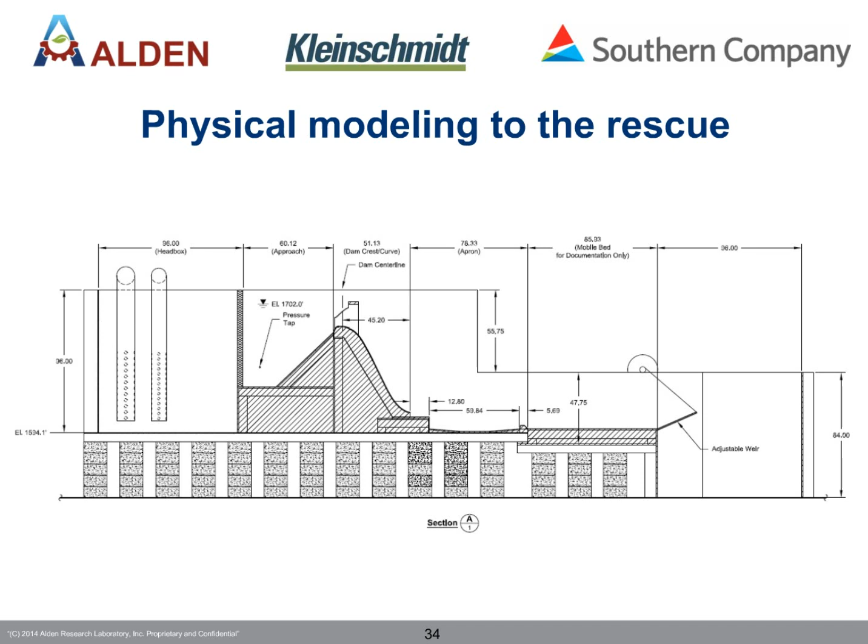We were having to model bringing air into the flow, and Dan mentioned that sometimes that can be an issue with CFD and even with physical models. So you do have to have a relatively large scale to try to evaluate the air being brought into the flows, the air entrainment.

Now, physical modeling does have a cost, as Dan had mentioned, but the modifications being considered for the dam are obviously considerably more costly, and we wanted to confirm through the physical modeling if the ventilation we had was doing anything for us, and if it wasn't, find the best and most cost-effective solution.

Through the physical modeling, we were able to confirm the CFD model and that we had negative pressures. What we found was, even in the baseline conditions with the vents installed, the 3 small round vents, it essentially didn't do anything for the negative pressures that were forming. It was probably doing something locally right where the vents were located, but in the overall flow it was really not reducing them at all.

So basically, through the physical modeling, it confirmed that we needed to address the uplift forces being created by these negative pressures. It's interesting that we did the CFD model to address an issue with our PMF elevation, and what it helped point out to us is that we possibly had another beyond design basis condition with the negative pressures and uplift forces being created on the dam.

I'm not an H&H person, I'm a geotech structural guy, so it didn't jump out at me that we may have a negative pressure issue on a spillway like this. Somebody that does that work a lot more, it may have jumped out at them when they saw the dam.

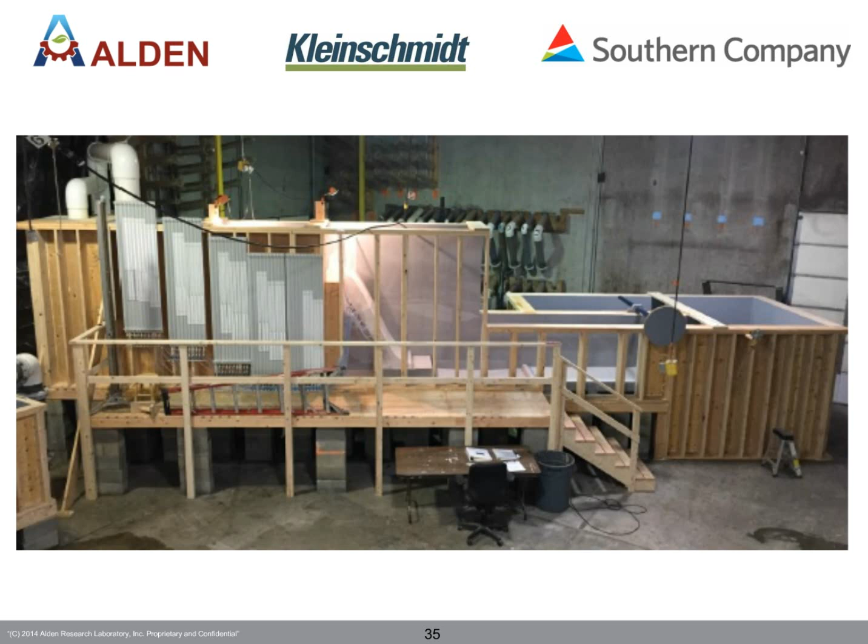But it was good through this process. We started, for one thing, it was helping us find other things we needed to look at. Obviously we didn't like that we were finding new problems, but it was good it made us aware of them so we could address them. It basically pointed out that we had either changed or maybe not well understood loading conditions from original design.

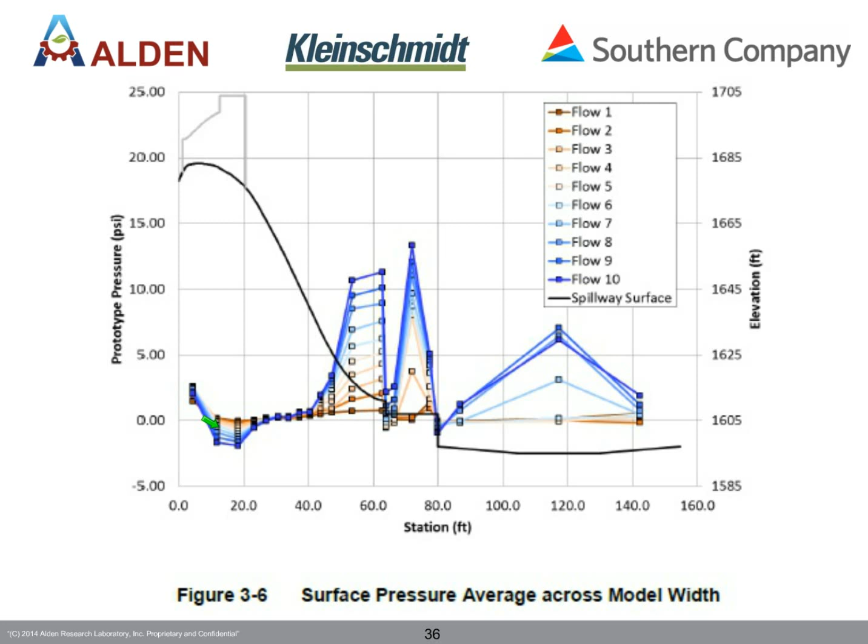This is one of the modifications we tested. This was the original edge of the spillway, and this is the edge of the spillway gate. One of the things we looked at was creating a more natural OG shape until we got to the end of the piers. Once we got to the end of the piers, we had separation and flow in this area right here, at which point the flow could ventilate itself and we would reduce those pressures.

What we found is, you can see right here, these were the baseline conditions, and this is the modification we tried just by adding vents. But then these modifications right here show the modified OG shape, and you can see how we essentially eliminated the negative pressure issue. There's still a small amount of negative pressure, but that would not be an issue based on the weight of the slabs, and that could be dealt with by modifying the spillway up in this area. So the physical model gave us the answers we needed, plus allowed us to inexpensively test different modifications to see what would be effective in reducing these pressures and maybe be the cheapest option to fix that problem.

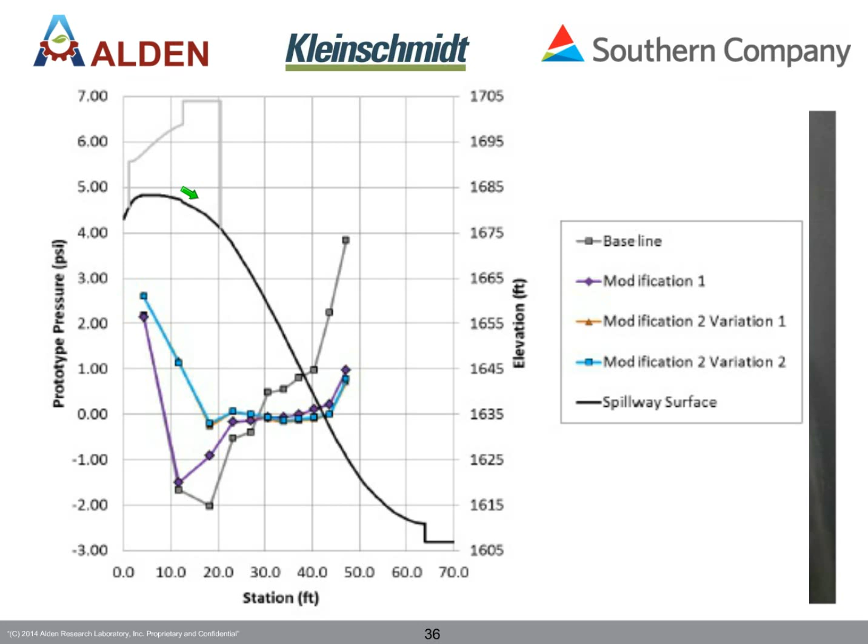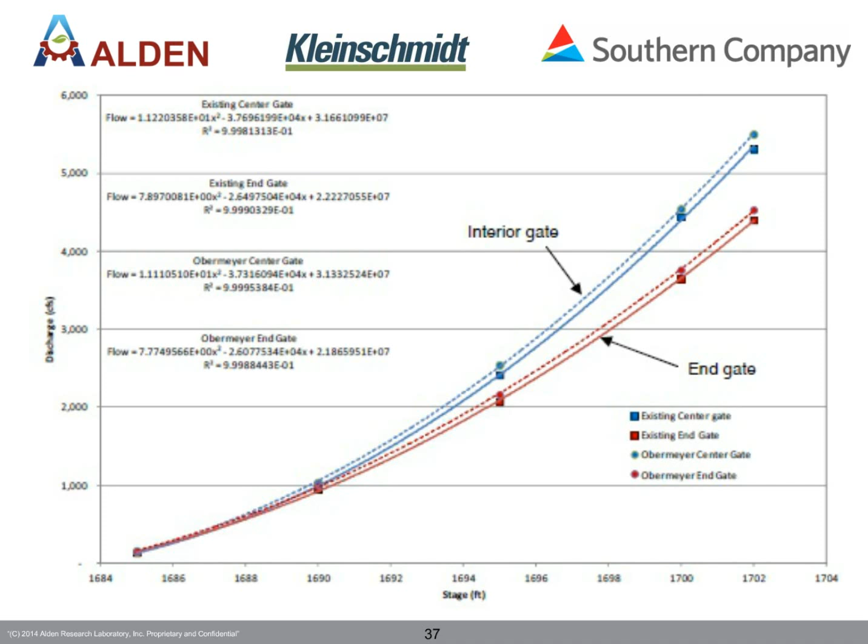One other thing I'd like to mention about the physical and CFD modeling we did on Mathis Dam is that dam had bottom hinge steel gates that had been replaced with Obermeyer gates. The Obermeyers were somewhat curved, a more natural shape for the water to spill over the spillway. We had to confirm that our discharge curve could still pass the same amount of flow we could before the gates were replaced. And since we already had a CFD model in our back pocket, relatively inexpensively, we were able to get Alden to basically check our spillway capacity through the CFD model. What we found is the Obermeyer gates were actually slightly more efficient because of their more natural OG shape. So we did not raise our PMF elevation by changing the gates to Obermeyer gates. We were able to relatively easily confirm that for our regulator.

So these issues I talked about, the changes in the HMRs for our PMF back in the 80s, the concern about impacting our spillway bridge because of the changed PMF elevations, all these things I've talked about, where did that come from? How did we know we needed to check those things? Well, we're regulated by FERC, the Federal Energy Regulatory Commission, and Southern Company Georgia Power has a structured dam safety program, and that includes the Part 12D process that's required by FERC, our regulator.

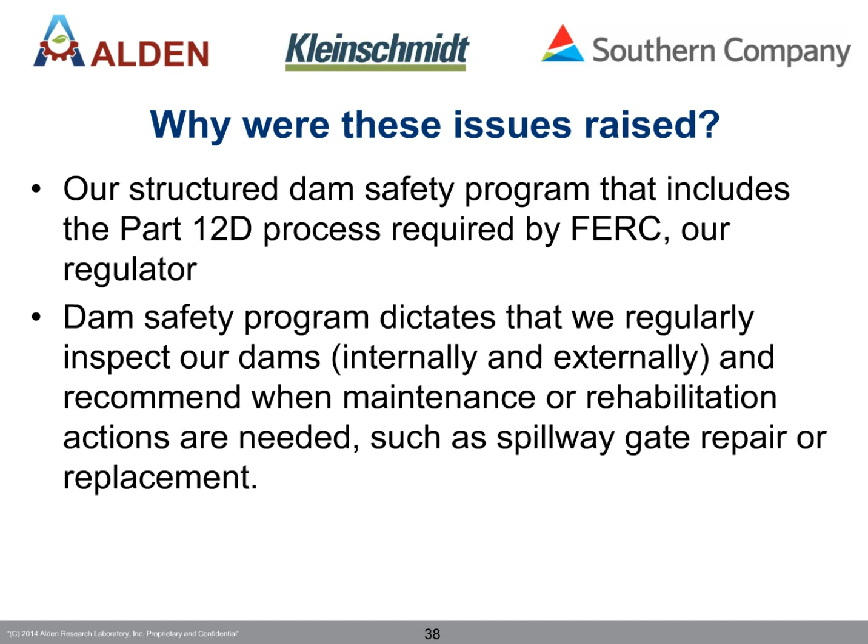The dam safety program that we have dictates that we regularly inspect our dams. This includes internal inspections by dam safety personnel like myself, and also external inspections. We have consultants come in every 10 years to inspect our spillway gate. We do 5-year underwater inspections, and this is all driven partly by our own dam safety program in conjunction with the regulatory requirements for a dam safety program.

The Part 12D process comes out of the Code of Federal Regulations, and it's in FERC guidelines if you're not familiar with it. Part of that is what we call the Part 12 inspection process. Paul Sear mentioned he's an independent consultant - that's where he comes into play, he's one of the consultants that does this for us. Basically every 5 years our dams and their design basis are reviewed by this independent consultant. It's basically to put a fresh set of eyes on our dams and to look at our facilities.

They look at the condition of the dam, but they also look at the current stability. They look at the structural design. They look at the design floods that are used. Do you still have adequate spillway capacity? Do you have an adequate surveillance monitoring program? Things of that nature.

Southern Company already has a relatively strong dam safety program, but in conjunction with FERC regulator in this process, it really helps us take a look at our dams and realize we may need to evaluate certain design basis standards. Have they changed since original design and construction? Have they changed because of something upstream or downstream? If you're not driven by a state or federal regulation to have a similar process, I think it would probably be a good idea for anybody that has a portfolio of dams.

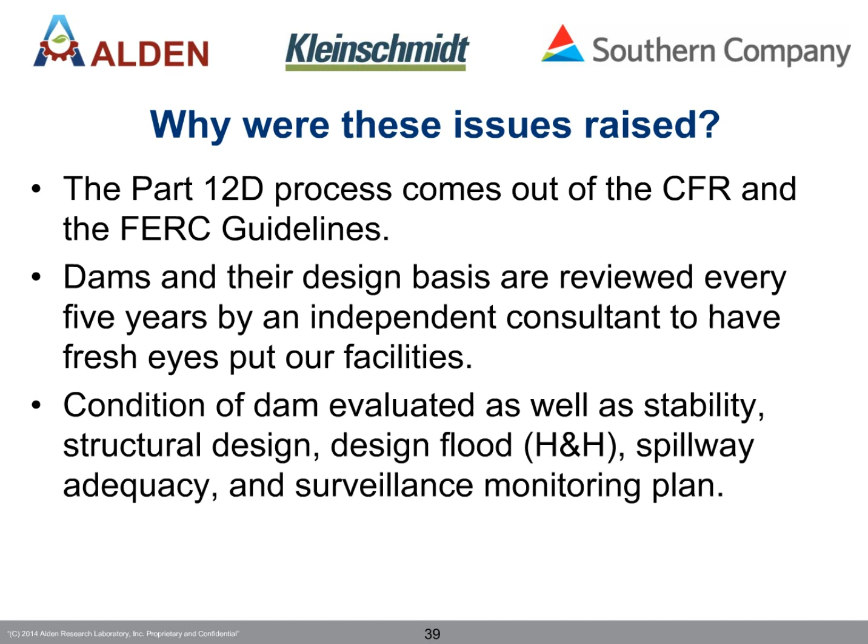Because of the processes that are in place, the Part 12D process and our internal dam safety program, we were able to find these things out and address them, so we didn't have future problems with our dams. So with that, I will turn it back over to Dave. Thanks a lot, Todd. Appreciate it.

So just to summarize for everybody, we had Paul talk to us about how beyond design basis operations can affect dam safety. We had Dan talk about tools for predicting spillway performance, and then Todd talk about the owner's perspective with sort of a case study.

Folks can start entering their questions in the chat box on the lower right, but while people are typing in their questions, Dan, I wonder if you want to expand upon some of the discussion that's already taken place through the chat area, and in particular, how when you have validation data for one flow for CFD, how do you know that you're still okay when you go to a much higher flow?

Yeah, so there were a couple of really good questions that were raised, and the first one kind of points to the fact that you can use a CFD model to extend your physical model results. One limitation of the physical models is that we can't push the flows always to the maximum design flow because we simply can't pump that much water. But if we can validate the CFD model for a series of flows that are less than that, that would give us confidence in the numeric model, and then we can apply the numeric model for flows that we might not be able to test in the physical model. I don't know if the person made that point explicitly, but that's a very valid way that we use numeric models. Do you want to comment on how you know to trust that?